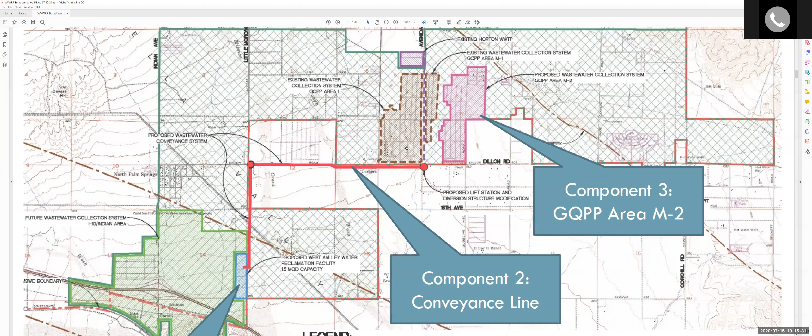Let me try to zoom in here. I know this isn't the best graphic to explain what's going on, but the conveyance line is a gravity sewer that comes down from Dillon and Little Morongo due south all the way to the proposed treatment plant. Right here where I'm circling my cursor is where it crosses over 18th Avenue.

And the issue we found during design is that there's public right-of-way on the east side of the street center line. Right here, everything north of 18th, there's an existing right-of-way only on the east side of the section line, going north-south. And then immediately south, there is only public right-of-way on the west side. So in essence, we have a checkerboard pattern where we have right-of-way in this corner and this corner, no means to cross from one side of the street to the other with the proposed gravity sewer.

We are looking at two different options, and the first of which is an easement on this corner, the southeast corner, which is currently conservation land, but the district has prior prescriptive rights, the way we understand it, because we have water facilities there. Due to Department of Public Health requirements, we're trying to maintain more separation than going that route would ultimately allow. So we're looking at partnering with the city, or I should say we have been in discussions for the last 3 or 4 months with the city to partner with them to get us right-of-way on the west side between Dillon Road and 18th for street and utility right-of-way.

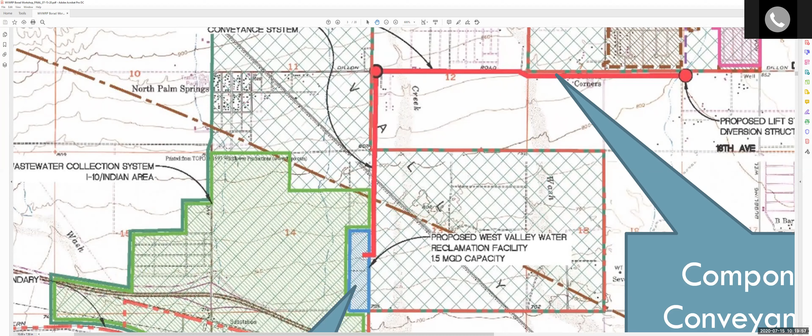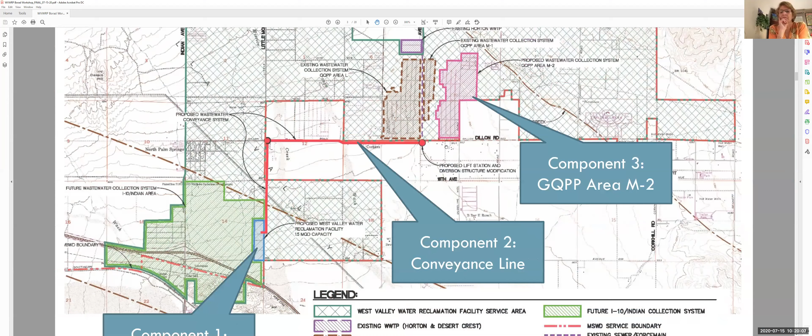No, that's purely for graphic reasons. I just didn't want all those different colored lines stacked on top of each other. That's the only reason you see that kind of jump. This pipeline stays on one alignment for the most part all the way down Dillon Road. We're north of the center line, and there is no real jogging that would upset the flows and cause more pumping costs or anything of that nature. Okay, great. That's good news too. All right, thank you. That relieves a whole lot of pressure on the thought of voting for it.

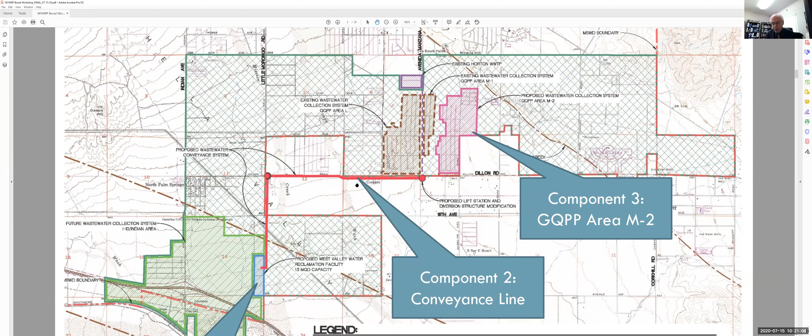Thank you. Director Grashaw, I might add that you also asked what other regional agencies are working with us. The primary one is the Regional Water Quality Control Board, because the green area down here basically has a prohibition on septic tanks. By moving to this area, we're providing the opportunity to provide sewer service in that area and the additional treatment that they will need. It also gives us the opportunity with the Bureau of Reclamation to do reuse.

So we have a number of other agencies that, in the long run, I don't know if you'd say they're partnering, but they were also a part of the decision process and part and parcel to cooperating with us.

One of the other thoughts that I have is that the cost of building this plant will be spread across all the ratepayers, I think. And I would like somebody to put a little bit of effort in explaining that aspect of it. It's going to benefit many ratepayers, but it's going to be paid for by all ratepayers. And I want to get an idea of what the debt service is going to be on the entire universe of ratepayers once we engage the financing.

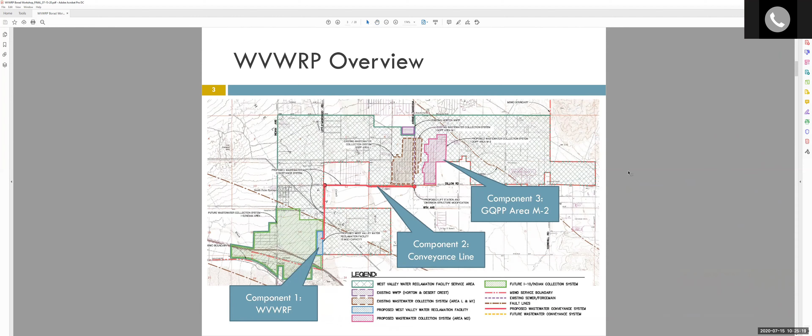Thank you, Danny. Okay, Steve Ledbecker. All right, thank you for that. So, I kind of ended with, this regional approach really gives the district operational flexibility, and that's what I'd like to touch on next. What I'll get into in a minute is explaining what these lines mean, but in essence, by having capacity down here at the southernmost portion of the district service area, we can connect virtually any portion of the district and deliver those flows to the regional plant.

There is an interceptor sewer planned for the future over here on Indian Avenue that would bring all flows north and west of Indian Avenue to the regional plant. There's an interceptor right here on Little Morongo that would connect all areas north and west of Little Morongo and deliver them by gravity to the regional plant. In addition, there was discussion on the decommissioning of the Desert Crest plant and bringing all these areas east of Horton over, following my flow arrows, to the regional plant.

And lastly, it provides the opportunity to interconnect the Horton plant with the regional plant using primarily existing facilities inside Avenida Manzana that are currently pumping flows north up to Horton. With a little bit of work, we can interconnect those facilities and divert flows from Horton and bring them down to the regional plant. So really, building the district's treatment capacity here is going to give the district flexibility to meet not just near-term, but all future wastewater treatment needs.

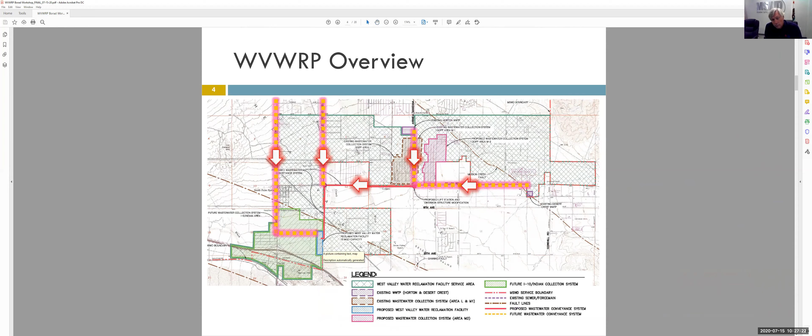So now that we've gone over the overview, I'd like to spend a little bit of time to talk about where it was initially envisioned and the steps that got us here today. In 2006, the district's wastewater master plan identified 3 different kinds of treatment projects, if you will. It identified the regional wastewater treatment plant, and again, it was located at the southernmost boundary, so it could serve a majority of the service area. It could be collected and conveyed via a gravity system. And it envisioned an ultimate capacity of 20 million gallons per day.

So once the district's entire service area is built out, it would need a total capacity of 20 million gallons per day. That's certainly sometime off in the future, but that's what was planned for at the regional location. It also envisioned decommissioning the Desert Crest wastewater treatment plant and sending those flows over to the regional plant to minimize that impact with that aging facility.

And lastly, it looked at a potential Horton expansion, and it also envisioned potentially abandoning the biosolids drying beds at Horton and sending those to regional. Now, the biosolids drying beds have already been taken care of with a belt filter press system at the Horton plant. In addition, as we've talked about, expansion at Horton is somewhat limited due to the very close proximity to existing residential areas.

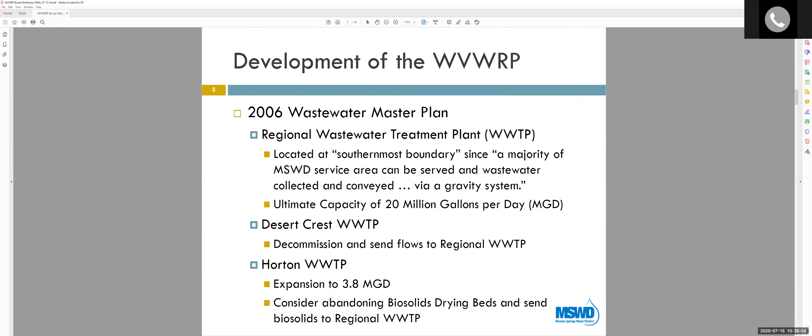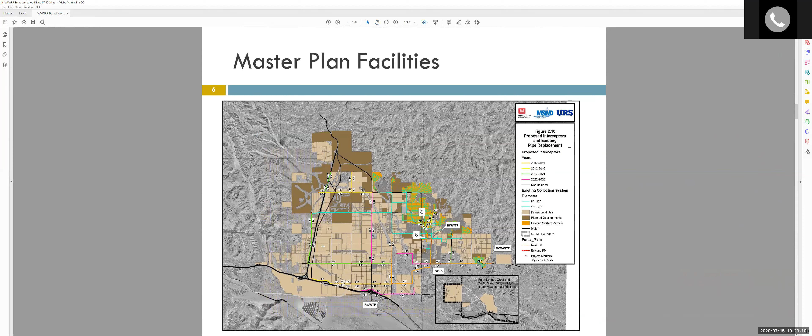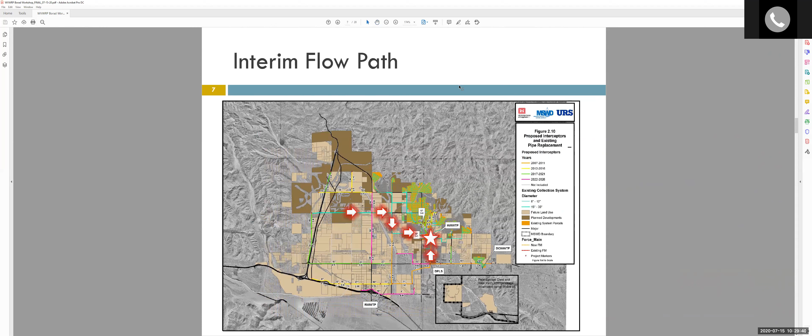In addition to just the treatment plants, the master plan laid out a network of backbone trunk sewers and interceptor sewers that would bring all flows to both of these treatment plants. And in the interim, since the capacity was at the Horton plant, flows coming east along Pierson and south along Little Morongo ultimately come across Two Bunch and flow to the Horton plant. In addition, anything south of the Horton plant is currently pumped up to the Horton plant. And the master plan envisioned that the ultimate flow path, these trunk sewers and interceptor sewers, would then intercept those flows and bring them down south by gravity to the regional plant.

So I wanted to toggle between those two just to show, again, in the interim, everything was meant to flow to Horton as we have, but now that we've reached the capacity at Horton, we can start working towards the ultimate vision, which is flows going to the regional plant. And as you can see here, we provide a great benefit to existing developed areas with the regional plant while allowing Horton to service a lot of the city center areas and the groundwater quality protection program areas.

Can I, one more? Certainly. On all of these things you just described, how much infrastructure is involved besides the plant in terms of pipelines and things of that nature to be able to have it all flow, for instance, to the regional plant as opposed to the two other plants that are currently in service? We'd have to obviously build a bigger plant, I guess, but you paint a rosy picture. That's the picture that I have in my head of being able to approve. What does it take for us to get there? I'm not suggesting that we should close any plants, but having the ability to shift is something that I find very attractive. So can we get there from where we are without going way over the budget that you have in place now for this plant?

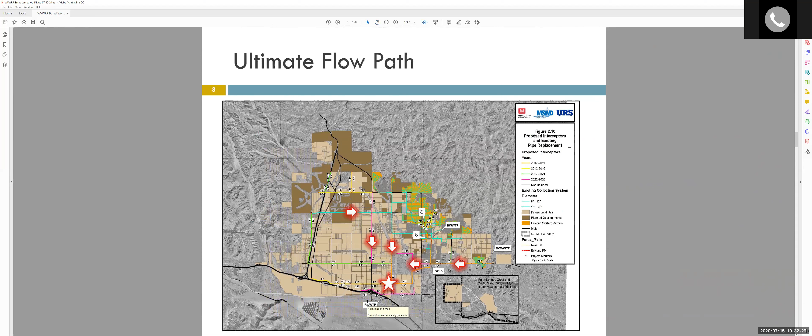So moving on to 2008, you know, that was in 2006, the master plan. In 2008, with the economic boom going on, the district commissioned a wastewater facility strategic plan. And that really tried to focus in on the timing of a Horton expansion, of decommissioning the Desert Crest plant, of building the regional wastewater treatment plant, and when we'd need these interceptor sewers based on where development may or may not occur. Then the economic recession hit right after that, and all development ceased for quite some time.

So it wasn't until around 2013 through 2016 that the district reinitiated the wastewater facilities planning process to kind of reevaluate where the needs are and how we could best meet the district's wastewater treatment capacity needs with the planned facilities. We knew that during that time, if we expanded Horton, it would meet the need for the additional treatment capacity, but it would be limited to only accepting growth from downtown areas, and it would provide no operational flexibility with just the one plant. But by constructing the regional plant, we could meet the treatment capacity needs while providing the district with the flexibility to respond to various existing and future needs as required.

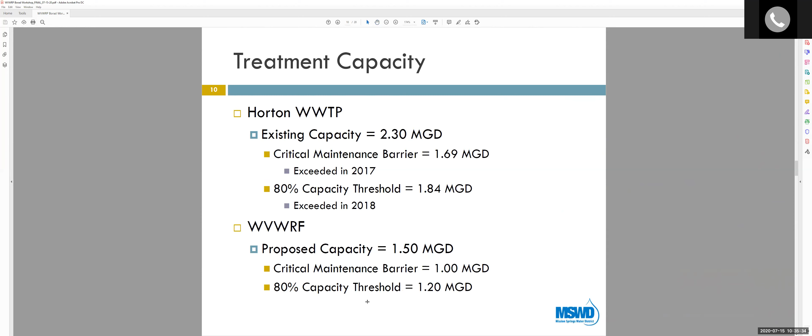So what you'll see is there's a few different areas. Areas H and I, those are currently under design, those are shown in red. Areas M2, J2, and D3, those have design completed. They're ready for construction whenever we can line up grant funding dollars. And areas A, G, and K are both design and construction. Areas A and G are slated to be funded for design through the Army Corps', I think the 2019 funding.

So really what I'm showing here is that the district's success is continuing, and we really need to add additional capacity to serve the existing communities. So the capacity we're building, yes, it can accept growth, but we're really adding that capacity just to take care of the district's success with the existing communities that we serve. By taking them off septic, protecting our groundwater resources, and treating that water to a much higher quality before it's discharged back into the groundwater aquifer.

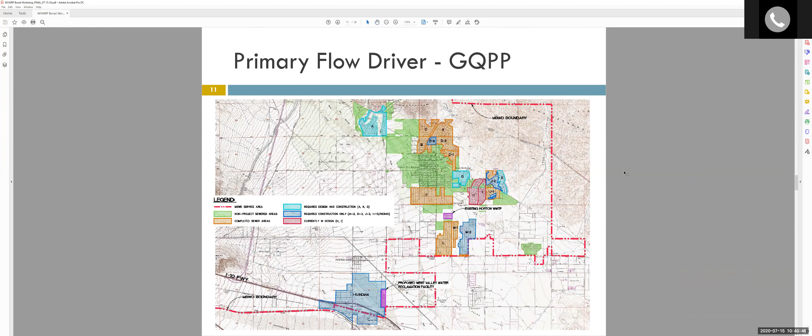So we're now culminating and bringing this back together as to what really developed this regional approach. I know this graphic is really hard to read, so I have a couple zoom-ins on the subsequent slides. But what's ultimately envisioned is these areas shown in blue are really the service area for the existing Horton treatment plant. And when we did our flow projection analysis, we were able to say, if we were able to divert some of the existing flows from south of Horton away from Horton, then Horton could accept a majority of the flows from the groundwater quality protection program. So the existing communities are going to benefit from the additional capacity created down here.

In addition, once we convert area A, we would need to divert some additional flows, whether it be on Little Morongo Road or divert them from Horton. The Horton facility can accept 100% of the groundwater quality protection program flows. And that's really a key benefit that I want to try to convey today. So again, the Horton plant is really just servicing the downtown district. It's primarily existing developed areas with limited future development.

I know there's only been a little bit of talk about a potential development here. Danny may be able to clarify the name of that development. It's escaping me at the moment. And then there's the potential for an existing development maybe out in this area, but there really are no proposed large-scale developments that would need to flow to Horton. Whereas the regional plant can accept everything south of Horton and everything in the district's north and west service areas.

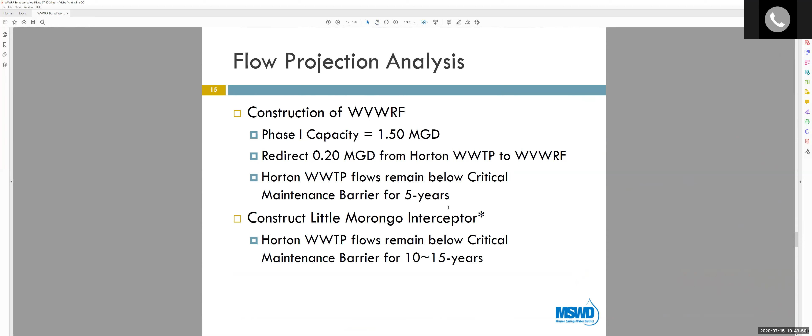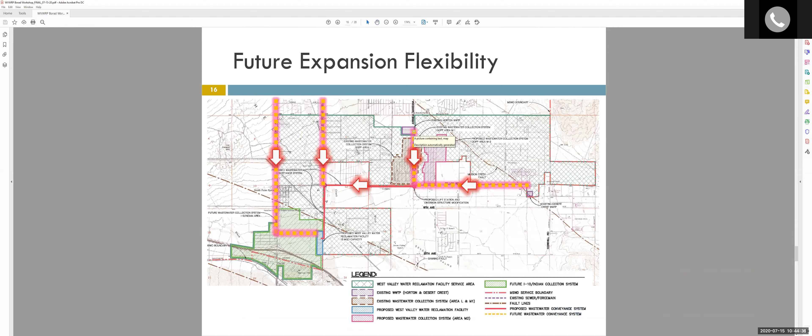Now I wanted to talk a little bit about the funding for the West Valley plant. What we talked a lot about today is, really the driver here was additional treatment capacity. And I only need to meet additional treatment capacity with component 1, the treatment plant itself, and component 2, the conveyance line. Connecting additional areas does nothing to provide that additional treatment capacity. So you may be wondering, why are we doing a collection system? Well, we're doing a collection system because that maximizes the grant funding opportunities available to the district.

When I showed the slide earlier, I talked a little bit about how the communities that we'll serve are disadvantaged communities. They have a service population of less than 20,000, and by doing this collection system, an extension of the groundwater quality protection program, it also brings in another benefit, which is a groundwater protection component. And what that does is align this project up to get funding from multiple sources from the State Water Resources Control Board. The first of which is the Small Community Wastewater Grant Program. That program allows for up to $8 million in grant funding for projects that are regional and that serve a population of less than 20,000. And there's another hook with rates and disadvantaged communities, which the district meets both. I won't bore you with those details right now.

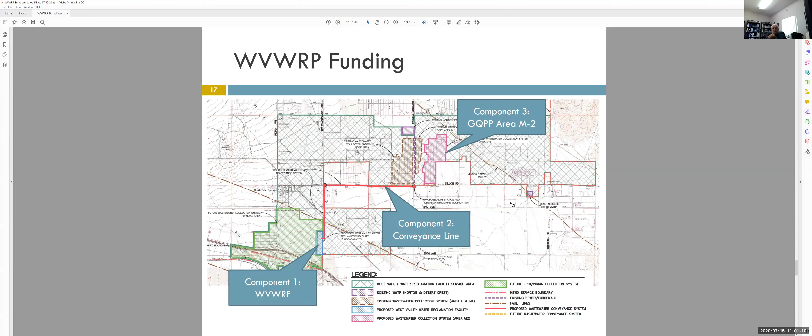Yeah, pardon? I had one, Steve, just on the timeline slide. I know you mentioned the right-of-way with the city is just a speed bump. Could you give maybe more specifics? Is that a mutual holdup between us and them, or really just on the city themselves? And then do you see any potential larger roadblock things that could come up that would affect the timeline?

Let's see, with the city, we prepared some plats that the city would need to start discussions with the property owners. We had started these discussions back in February or March with the city, and we prepared some plats that would help facilitate this process. A letter going out to the residents on city letterhead, to ask if they'd be willing to participate and provide a right-of-way to the city. And the city hasn't really made much progress since then, to be honest with you. So that's why I've been speaking with Director Friend, or the Director of Engineering Operations, that we really need to switch gears and take back control and probably go about it on our own.

And if the city's process ends up taking longer and they ultimately get that road right-of-way, well, great. But the project schedule, we're getting to that point that we need to start moving forward. Otherwise, it would potentially impact the overall project schedule. We certainly don't want to finish a treatment plant and have it ready for operation and not have a pipeline to bring flows to it.